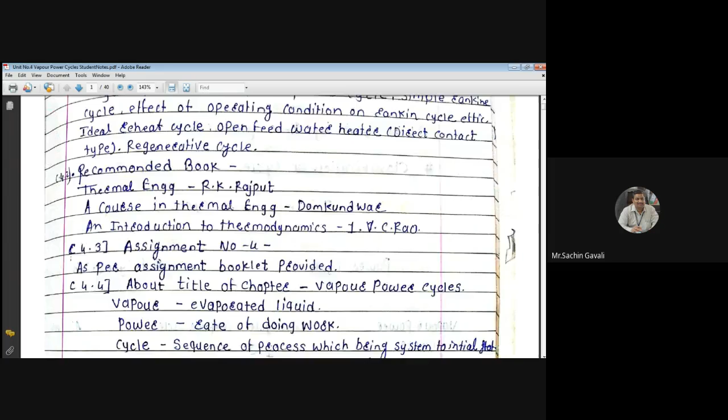Okay, last lecture I think we started the numericals on vapor power cycle, am I right? And those are your friends, yes, those not attending these lectures - how can they understand the numericals?

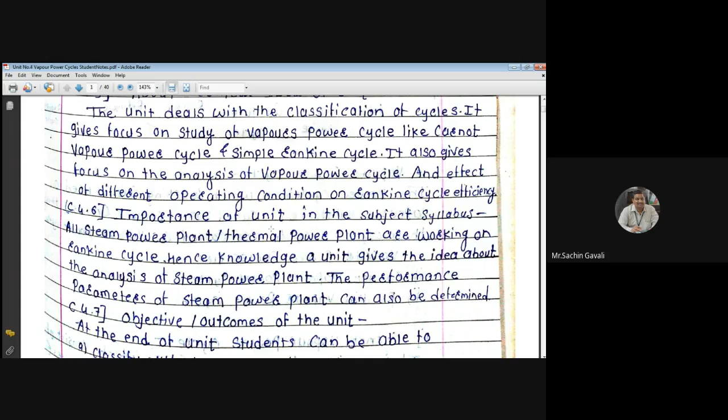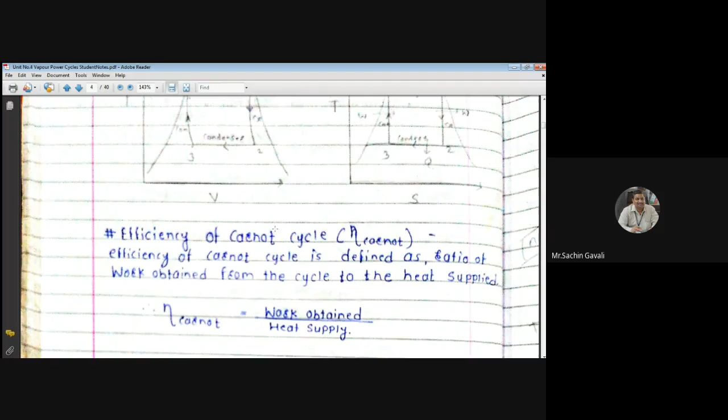So please ask your friends to join immediately, otherwise it will be very difficult for them to understand these numericals. I don't know why they are not attending, this problem with them I don't know. But still, request your friends who are not attending this lecture to attend, so that we can have more practice of this numerical, because in every examination they are going to ask numericals on this. Okay, so I think we have taken that last numerical.

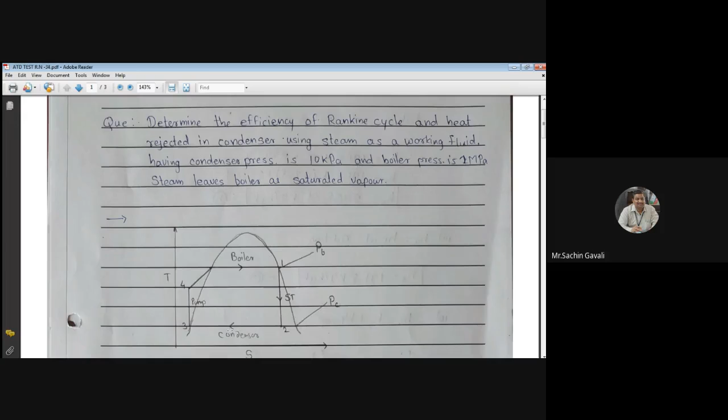1 to 2 is isentropic expansion, 2 to 3 is heat rejection in condenser. Boiler pressure is given in megapascal, we have to convert it into bar because steam table values are in bar. So he correctly converted 2 megapascal into bar: mega means 10 raised to 6, so 2 into 10 raised to 6 divided by 10 raised to 5 pascal gives 20 bar. Similarly, condenser pressure 10 into 10 raised to 3 divided by 10 raised to 5 gives 0.1 bar.

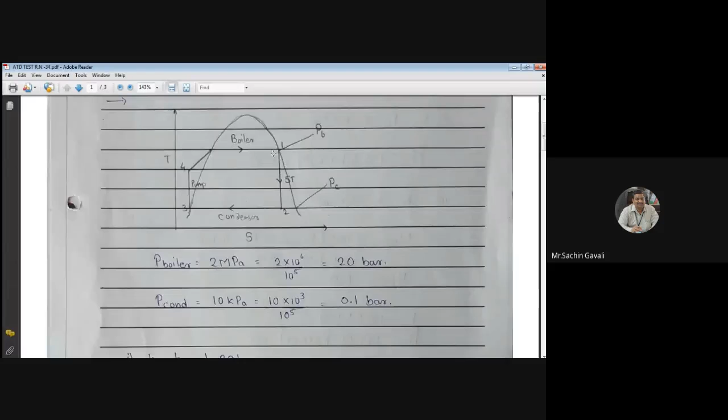Am I right? Then, as point number 1 is on the vapor line, we have to refer table number 2, and H1 is equal to Hg at 20 bar, which comes as 2797.2 kilojoule per kg Kelvin. Am I right? It is not Kelvin - it is wrong here, you have made a mistake. It is only entropy that has units kilojoule per kg Kelvin. This is enthalpy, so it is kilojoule per kg only. Take note.

So others' values are correct. Somebody can give... yes sir, correct. Okay good, so H1 is equal to 2797.2 kilojoule per kg.

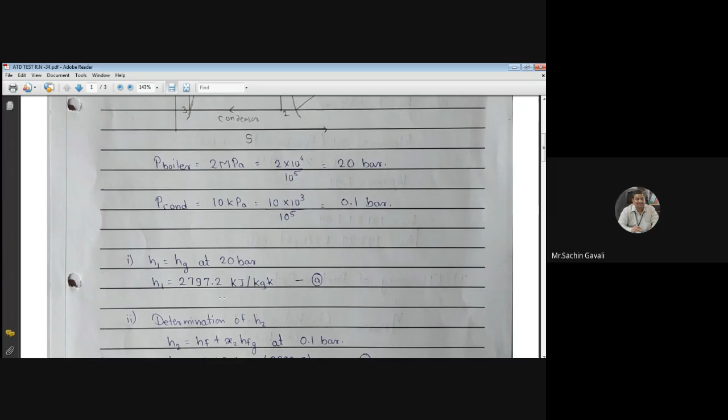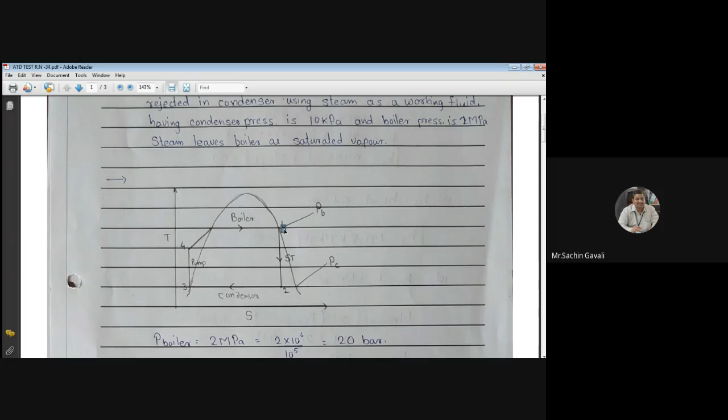Then we have to determine H2. Here H2 is there, wherever the arrow is here, H2 is there. This is the wet region, therefore its enthalpy we can calculate with the help of the wet steam equation. What is that equation? H2 is equal to HF plus X2 into HFG, and this HF and HFG we have to record at 0.1 bar because condenser pressure is 0.1 bar.

General practice: make sure pressure is written in the diagram so we can get the idea. At 2 condition, 0.1 bar we have to record. Again, we go for table number 2. Table number 2 means H2 is equal to HF at 0.1 bar, 191.8 plus X2 into 2392.9. But X2 we are not knowing.

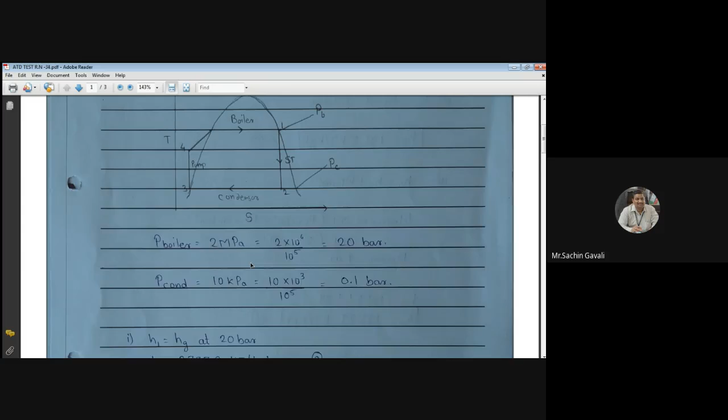We have to calculate X2 now, and for that we take help of the isentropic condition: S1 is equal to S2. Here we know S1 is equal to S2. Yes, the TS diagram is there.

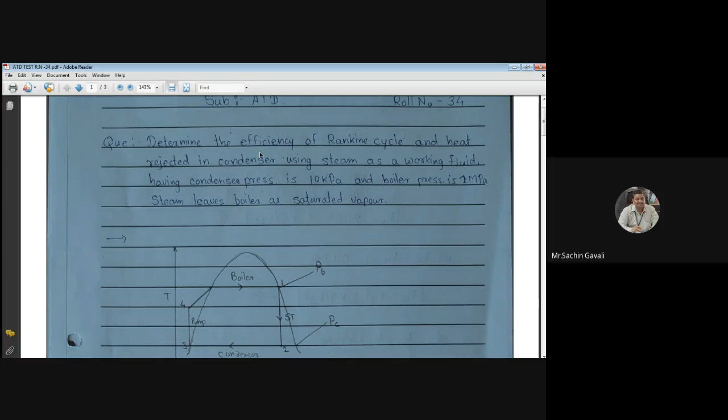S1 is equal to S2, and therefore S1 is equal to SG at 20 bar, since the boiler pressure is 20 bar. So S1 is equal to SG at 20 bar, not 2 bar, 20 bar. It will be 6.337 kilojoule per kg Kelvin.

It is correct. Then afterwards, S2 point is in the wet region, therefore its entropy will be similar to the enthalpy equation. What is that equation? S2 is equal to SF plus X2 into SFG. In that case it becomes 0.649 plus X2 into 7.502.

6.337 is S1, and SF at 0.1 bar is 0.649, and SFG at 0.1 bar is 7.502. If you do this calculation, 6.337 equals 0.649 plus X2 into 7.502, and X2 will come as

5.688 divided by 7.502, which gives 0.758, meaning it is 0.76. So X2 we got.

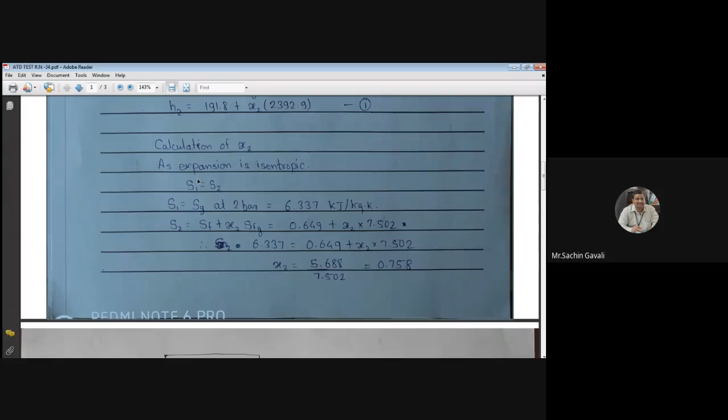After X2 we have to put this in equation 1: H2 is equal to 191.8 plus X2 into 2392.9. Putting X2 equal to 0.76, we get H2 is equal to 2005.61. H2 will be in kilojoule per kg.

Then H3 is equal to HF at 0.1 bar. Therefore H3 is equal to 191.8 kilojoule per kg. This is the value of H3 in this equation. You have to know that.

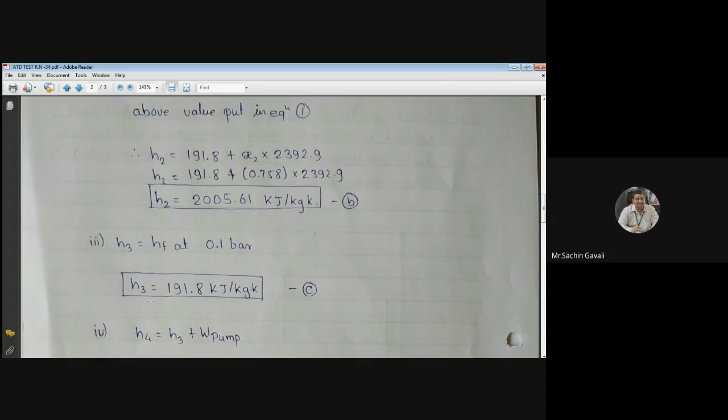H4 is equal to H3 plus W pump. Now H3 we know, W pump we can calculate with the help of boiler pressure and condenser pressure in bar. The equation: W pump is equal to 0.1 into boiler pressure in bar minus condenser pressure in bar, which becomes 1.99 kilojoule per kg.

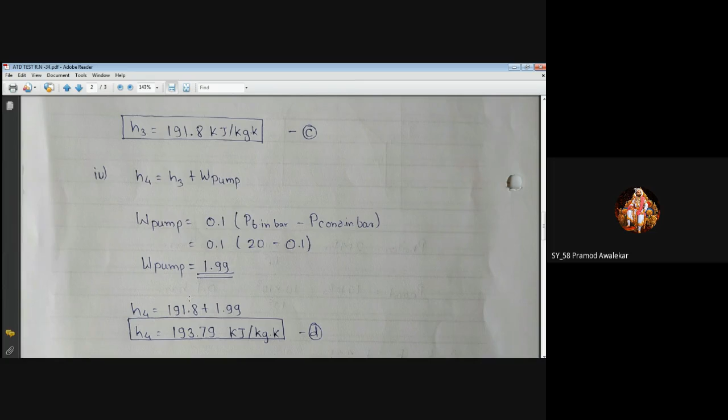So H4 is equal to 193.79 kilojoule per kg. This equation is there. Everybody getting same answers? H1, H2 - yes sir, okay good. Kunal - yes sir, okay. Pramod is also getting the same.

Then efficiency of cycle - we have the formula: heat supplied minus heat rejected, divided by heat supplied. So H1 minus H4 minus H2 minus H3, divided by H1 minus H4. This formula we have to keep in mind.

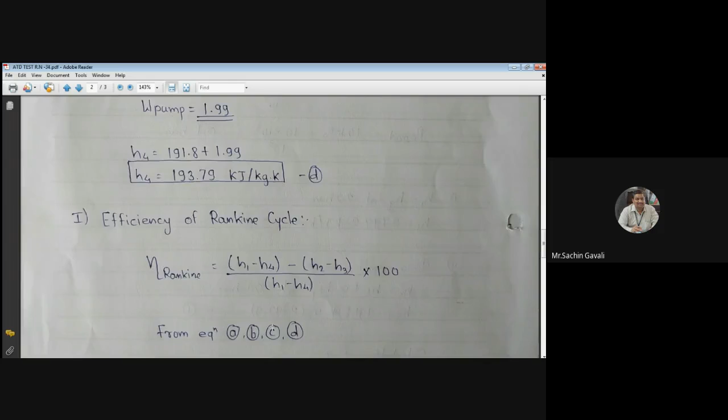Very simple - if you know the diagram and the processes correctly, only this simple thing: heat supplied minus heat rejected divided by heat supplied, or work done by turbine minus work done by pump divided by heat supplied. From equations A, H1, H2, H3, H4, if you put the values, efficiency is coming as

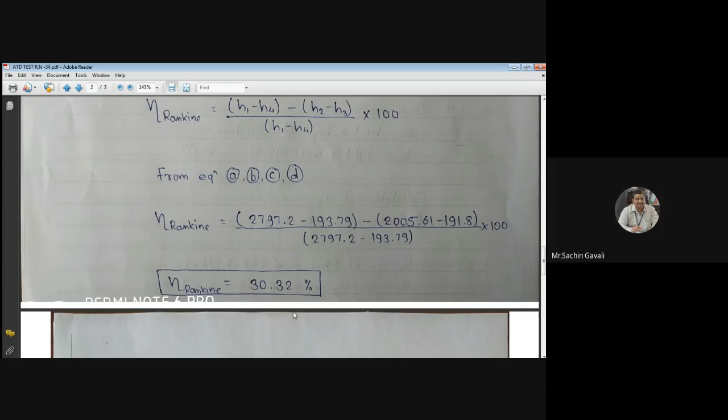30.32. And I have told you that efficiency is in the range of 30 to 40%. So this range is coming correct. I think it might be correct.

Work ratio is asked: W net divided by W steam turbine, equal to WST minus W pump divided by WST. Therefore WST is equal to H1 minus H2, equal to

791.59. W pump is equal to, already we have 1.99. Then work ratio is equal to WST 791.59 minus 1.99, divided by W steam turbine 791.59, equal to 0.997. Already I told you work ratio is always in the range near to 1, maybe 0.98, 0.99. Here it is very, very near to 1.

Heat rejected in condenser is equal to H2 minus H3. What is heat rejected? 2005.61 minus 191.8, therefore it is equal to 1813.81 kilojoule per kg. And SSC is coming as 3600 divided by W net.

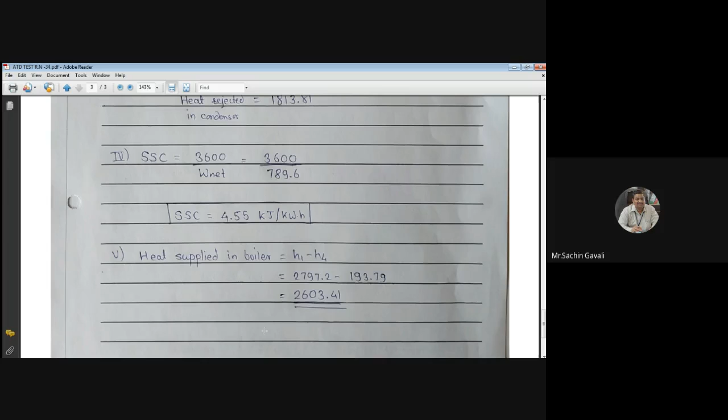Okay, so this is, I will go to the next numerical. On that day, that numerical we had taken from the PowerPoint presentation, na? Yes sir, okay.

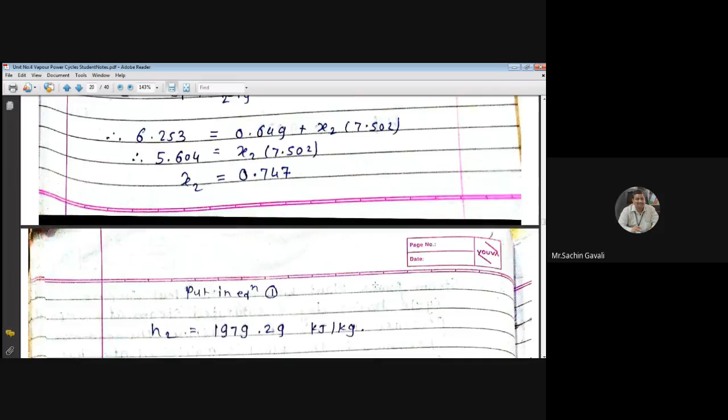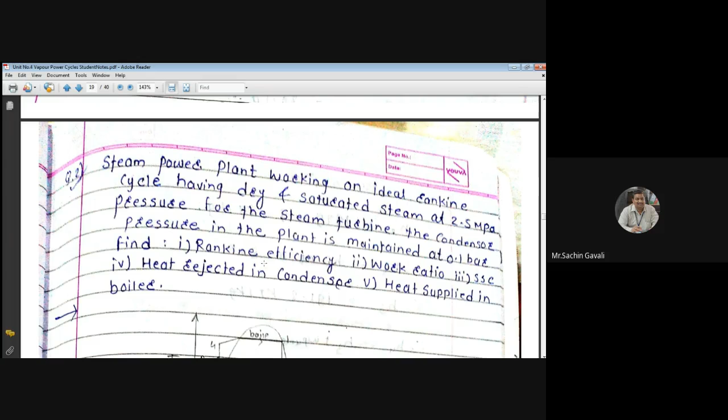So here, if you see, we are in other numerical, is there. This numerical were taken, am I right now? 2.5 or this only were taken, 2.5 megapascal. Let us have practice this. 2.5 megapascal were solved.

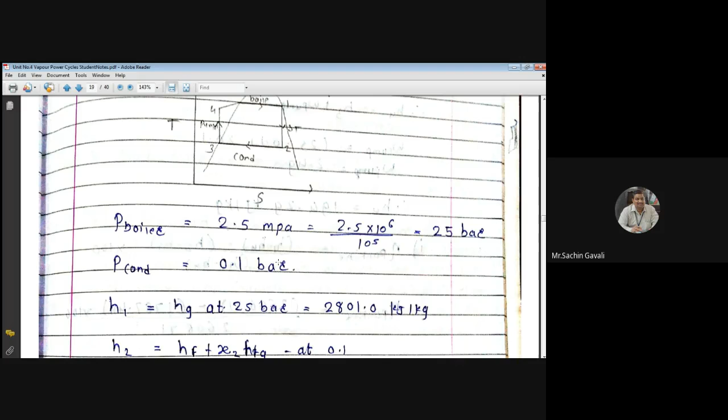Not solved, na? 25 bar and 0.1 bar, I did not solve. So let us have one practice numerical. Solved? This, solve sir, already solved. Jhale? Solve kelay sir. Solve, okay good.

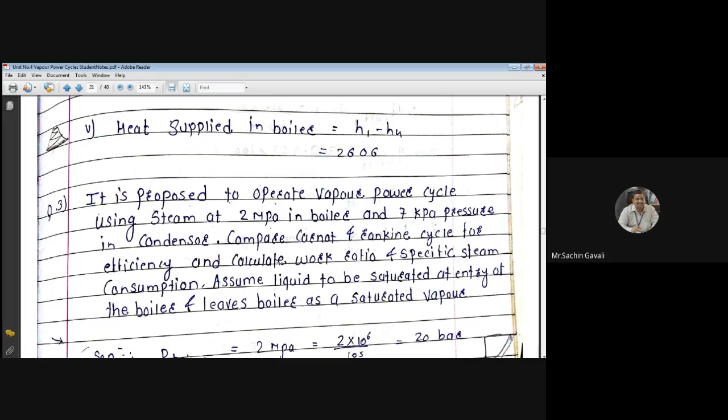Okay, now this numerical will take. Chalo. Okay, take this numerical.

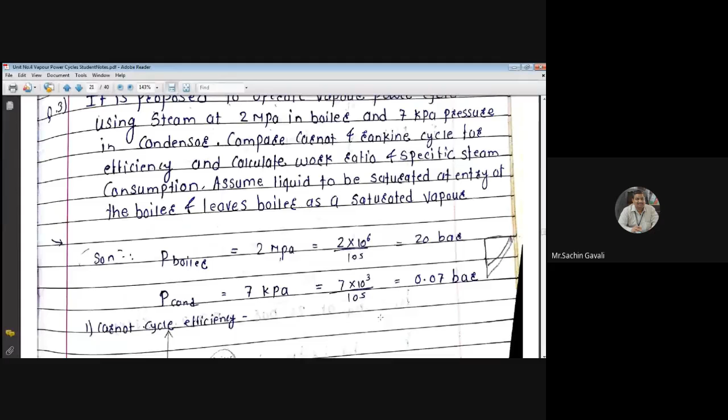So okay, so it is proposed to operate a vapor power cycle using steam at 2 megapascal. Now 2 megapascal means 20 bar, that we know. So 2 into 10 raised to 6 divided by 10 raised to 5 is equal to 20 bar. Okay, at the same time, here P condenser is equal to 7 kilopascal is equal to 7 into 10 raised to 3 divided by 10 raised to 5 is equal to 0.07 bar.

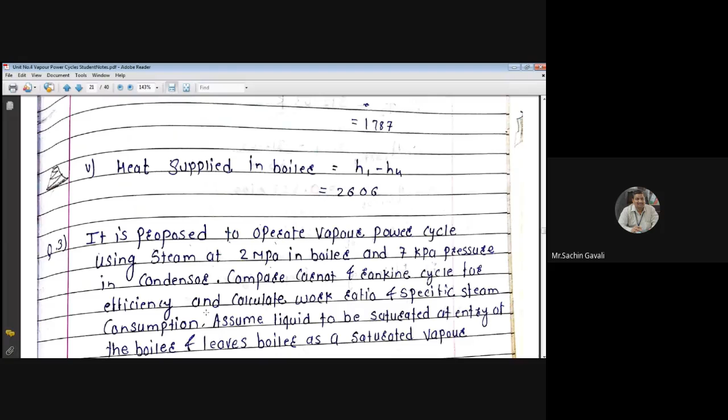Okay, and then Carnot cycle efficiency we have to calculate. Now Carnot cycle and Rankine cycle, both cycles' efficiency we have to compare here. Okay, Carnot cycle is an ideal cycle. So here, therefore, the heat addition process, if you assume the cycle as a Carnot cycle, it will only cover into this saturated curve, because heat addition during only this dome or curve will remain isothermal. So 4 to 1 is isothermal heat addition in Carnot cycle, and 2 to 3 is isothermal heat rejection in condenser in Carnot cycle only.

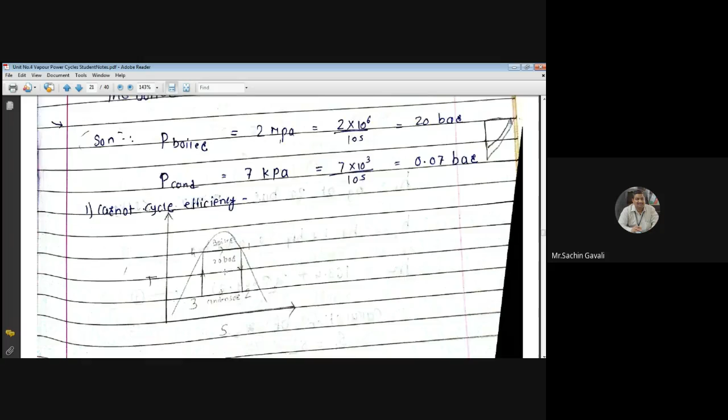Okay, therefore this Carnot cycle is bounded by a curve in a square. Okay, this kind of 4 to 1, 1 to 2, 2 to 3, 3 to 4. Because due to isothermal limitation, this process will not come outside this curve. Therefore, this is the Carnot cycle. Okay, and we know that Carnot cycle efficiency depends on only...

Anybody who is there, okay, who is studying here, I can get - Carnot cycle efficiency is a function of only... anybody? Temperature. Temperature only, correct. So therefore, Carnot cycle efficiency is related to temperature. So therefore, eta Carnot is equal to 1 minus T2 upon T1, or T1 minus T2 divided by T1. We have solved this, we have got this derivation, or we have got this formula. Am I right? But T1 and T2 should be in Kelvin.

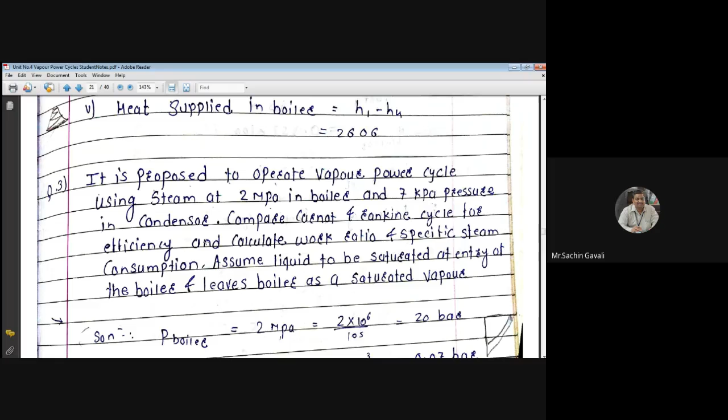312.03 केल्विन. मग किती झाले ते दोन्ही मिळून? हियर इफ यू कॅल्क्युलेट, इटा कार्नॉट इज इक्वल टू 1 मायनस 312.03 डिवाइड बाय 485.4, and the efficiency becomes 35.71. This is a Carnot cycle efficiency. हे न्यूमेरिकल 2-3 वेळा परीक्षेला आलेलं आहे.

ओके, Carnot cycle efficiency कशी फाइंड आउट करायची, बिकॉज इट इज अ फंक्शन ऑफ ओनली टेम्परेचर. त्याला टीएस डायग्राम आपल्याला माहित आहे तशी काढली आपण. फर्स्ट ऑफ ऑल ड्रॉ द टीएस डायग्राम, देन आफ्टरवर्ड्स we have obtained the temperatures, saturation temperature from the corresponding pressure.

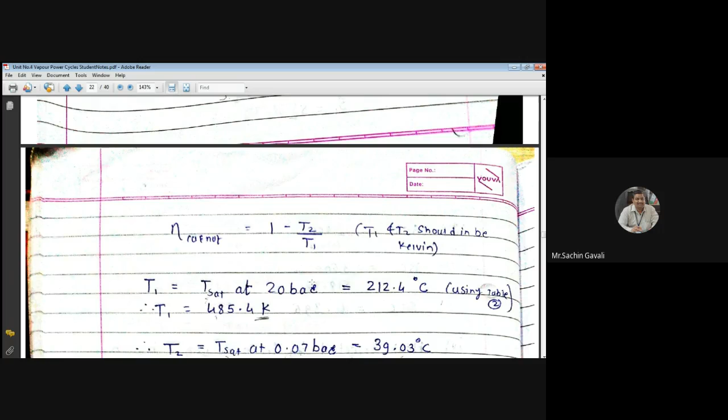that is T1 is equal to T sat at 20 bar, 212.4, त्याला आपण केल्विन मध्ये केलं 485.4. तसंच T2 is equal to T saturation at 0.07 bar, तो 39.03 डिग्री सेल्सिअस आला, आणि T2 आला आपला 312.03 केल्विन. इटा कार्नॉट आपला किती आला? 1 मायनस 312 आणि त्याप्रमाणे 35.71%. एव्हरीबडी अंडरस्टँड?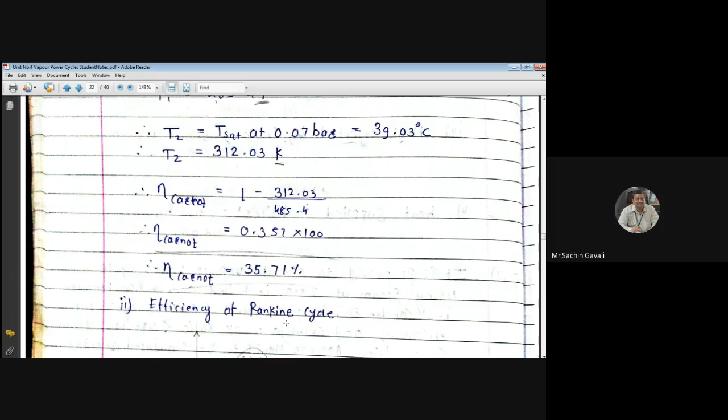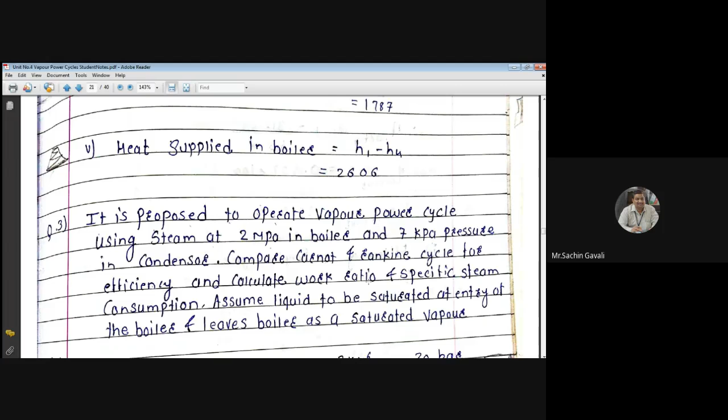Okay, then efficiency of Rankine cycle. Now we have to draw the TS diagram for Rankine cycle when steam entering to the turbine is dry and saturated, like our usual method. What is that, the efficiency of Rankine cycle, okay.

So 4 to 1, 1 to 2 is steam turbine process, 2 to 3 is heat condensation, 3 to 4 here is isentropic compression in pump, okay, and then 4 to 1 heat addition in boiler, okay.

And then in that case, now our usual practice, whatever numerical we have solved, this procedure I think it was little bit different than other numerical I have.

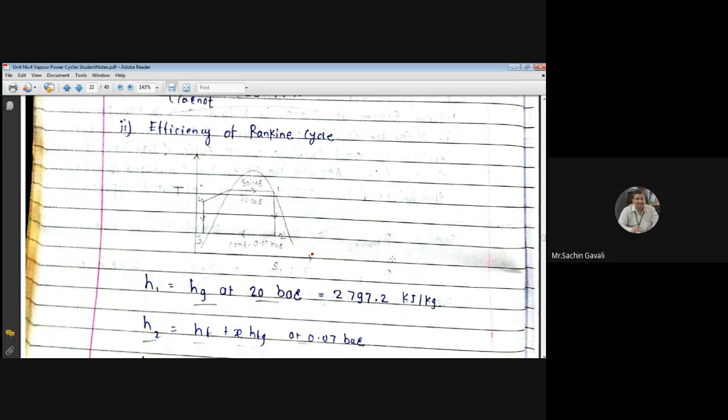Okay, so Kunal, Kunal is getting Carnot efficiency as 37.15%. Okay good, correction is there. Okay Kunal, okay no problem.

And Nikita Pawar is getting Rankine cycle efficiency as 31.53%. And Kunal is getting 32.25%. Okay, we'll see majority, others will wait. Somebody, other's answers will wait and we'll check the answers.

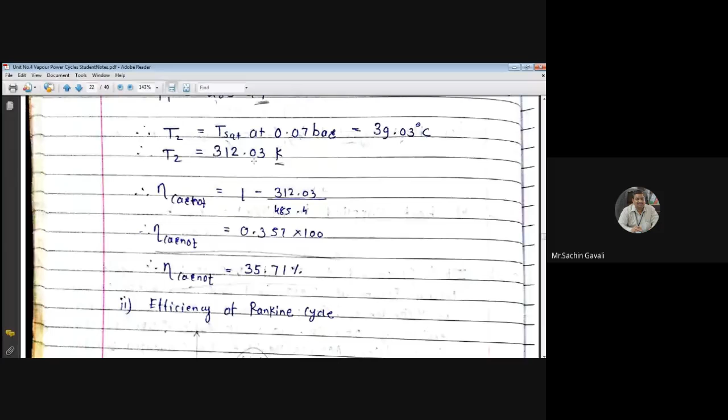So here I think, okay for others reference, 31.34. Both may be correct, that is not the big issue.

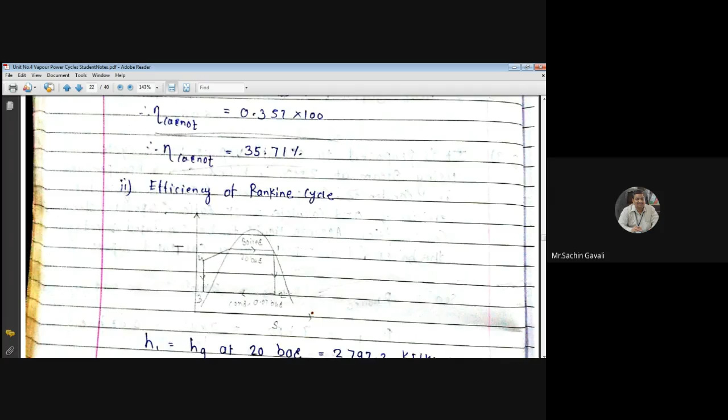Okay, now with this, H1 is equal to Hg at 20 bar, 2797 we got. H2 is equal to HF plus X HFG at 0.07 bar. Then HF at 0.07 bar, that HF and HFG we have to record from the steam table. Steam table: HF is equal to 163.4, HFG is equal to 2409.2. Everybody knows how to take this value, table number 2 I have to go for.

Then we write the equation: 163.4 plus X2 into 2409.2, equation number 1. Then we calculate X2, but how are we calculating S1? S1 is equal to S2 with that consideration, isentropic expansion in steam turbine. But S1 is equal to SG at 20 bar. Therefore, S1 is equal to SG at 20 bar, and is equal to 6.337.

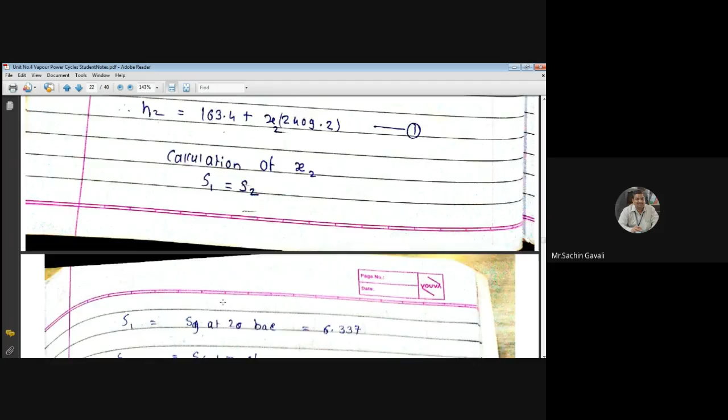At the same time, S2 is in wet region, point number 2, at 0.07 bar pressure. So S2 is equal to SF plus X2 SFG, is equal to 0.559 plus X2 into 7.718. As S1 is equal to S2, we can write 6.337 is equal to 0.559 plus X2 into 7.718, and therefore X2 is coming as 0.75. Am I right? Everybody's X2 is coming as 0.75? Yes, yes, yes.

If you put H2 is equal to 163.4 plus 0.75 into 2409.2, then H2 is coming as 1970.3 kilojoule per kg. Then H3 is equal to HF, H3 is equal to HF at 0.07 bar, and is equal to 163.4 kilojoule per kg.

Then H4 is equal to H3 is equal to 163.4. Then H4 is equal to H3 plus W pump. W pump we calculate as 0.1 into boiler pressure in bar minus condenser pressure in bar, and the value is coming as 1.993. Am I right? H4 is coming as 165.39.

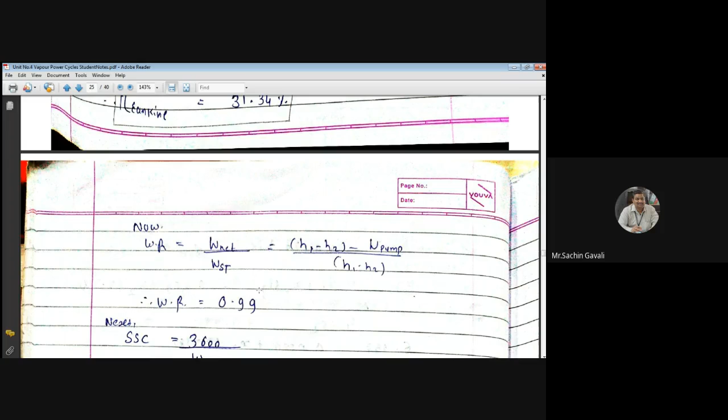So eta Rankine is equal to 31.34%. Some students are leaving in between, I don't know why they are thinking this way. Don't leave, tell your friends who are attending not to leave the class in between, because everything is important. These numericals are asked in examinations for 5 to 6 marks, so from the examination point of view, we should not skip the lecture, everything here is important, each and every sentence.

Your work ratio, if you want to calculate, is W net divided by W turbine, and everything we can know from that. WR is equal to 0.99. Kunal has also solved this and got the work ratio as 0.997, 999. Okay, then SSC.

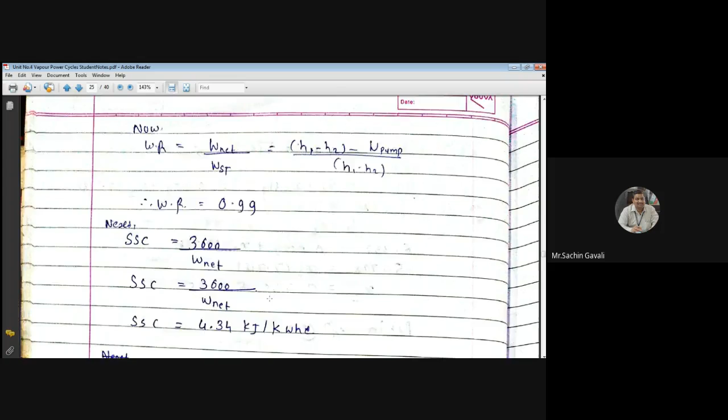Now here's another numerical for practice, same numerical. I want it done within 5 minutes. We have to complete this task today only.

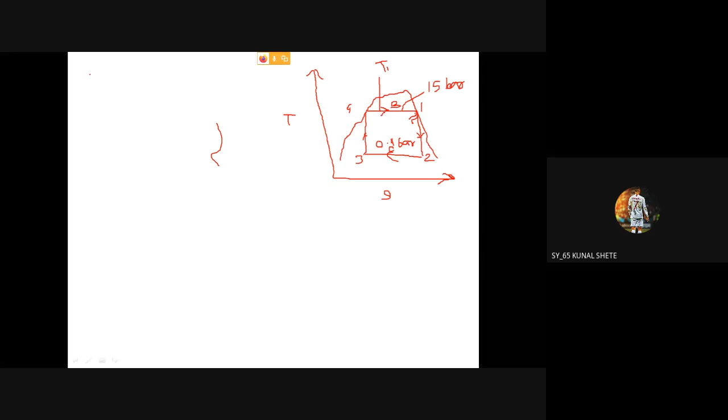Okay, then efficiency of Carnot cycle is a function of only two temperatures, T1 and T2. We can call this, sir, as 0.2 bar.

So we know that efficiency of Carnot cycle is a function of temperature only, and is equal to 1 minus T2 upon T1. Then T2 is equal to what, and what is T1? We have to find out. What is T1? It should be in Kelvin.

T1 is equal to T sat, saturation temperature, T sat at which pressure? 15 bar. And is equal to, who will tell now? T sat at 15 bar, saturation temperature. Kunal, fast, you tell.

Kunal, or somebody who is ready with the answer, please tell. T1 is equal to T sat at 15 bar, otherwise I have to go to my steam table also. Anybody ready? Put your answer. 198.3 degrees Celsius. Yes sir, and convert it into Kelvin, tell. 471.3, take it here in Kelvin.

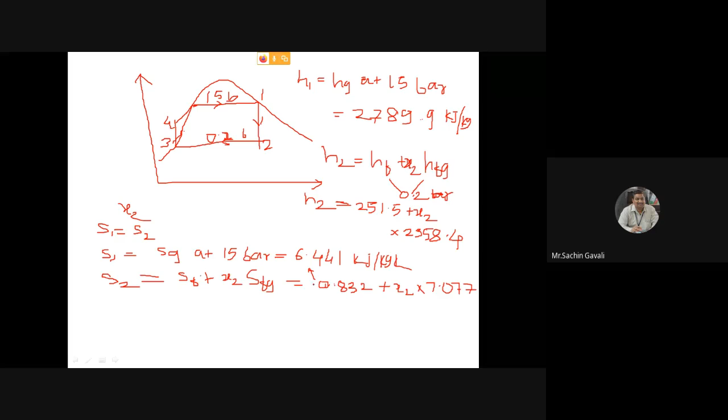What is that value of X2 coming? Shubham Gandole has answer 0.80. What about you, Kunal? 0.79, near to 80. You can tell the third digit - 0.792. Okay, majority will consider the answer as 0.79.

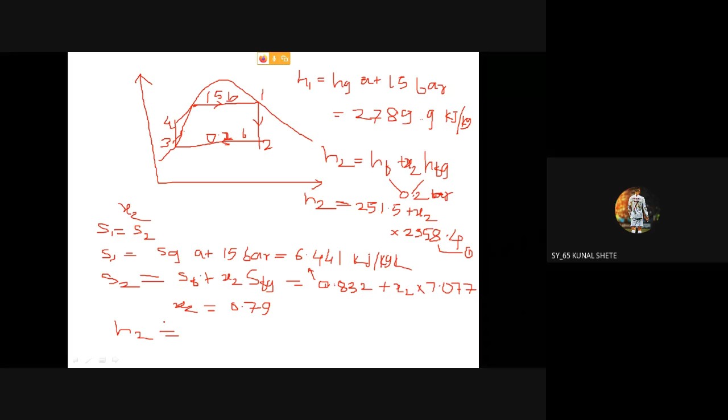Then once we got X2, H2 is equal to - put that value in the H2 equation, equation number 1. Not directly tell me the value, you have to put X2 only. I will not write all these things because it will take time. Somebody can tell H2 value. Shubham is speaking - 2138.22. Correct.

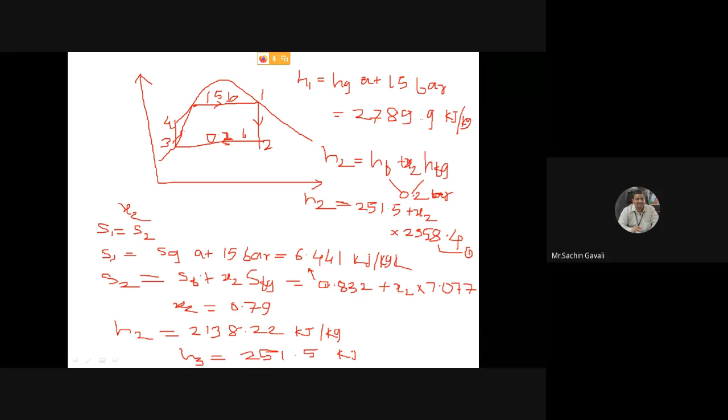Okay, then we have to calculate W pump, which is equal to 0.1 into P boiler in bar minus P condenser in bar. Therefore W pump is equal to 0.1 into 15 minus 0.2, and how much is it coming? Anybody help me? 1.48.

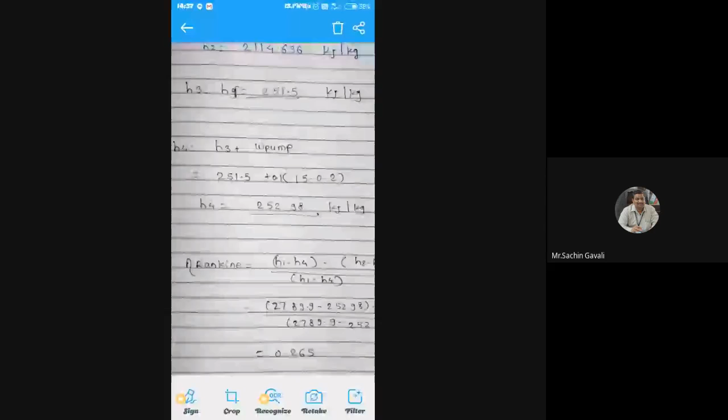Okay, now H4 is equal to 251.5 plus 0.1 into 15 minus 0.2, and it is coming as 252.98. Correct, H4. Then efficiency will become now.

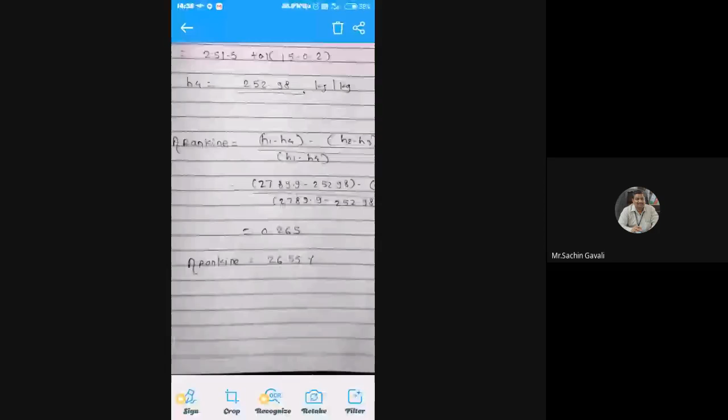26.55%. Okay, then what should be our comment? What should be our comment?

Comment is that Carnot cycle efficiency is greater than Rankine cycle efficiency.

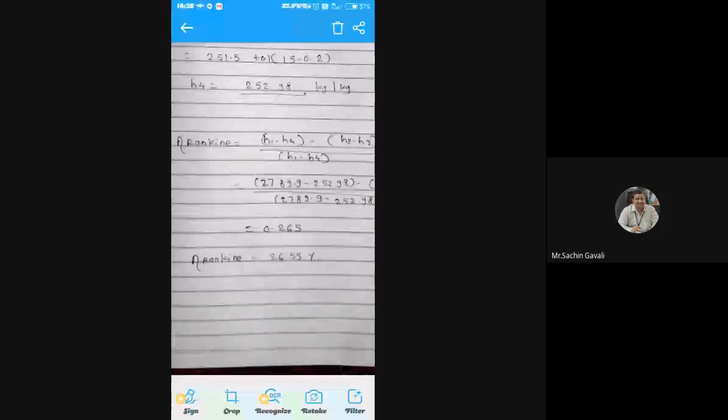Nikita, Kunal, okay, Gaurav. Then, okay, now next numerical will go for here: superheated steam supplied to the steam turbine. It's okay.

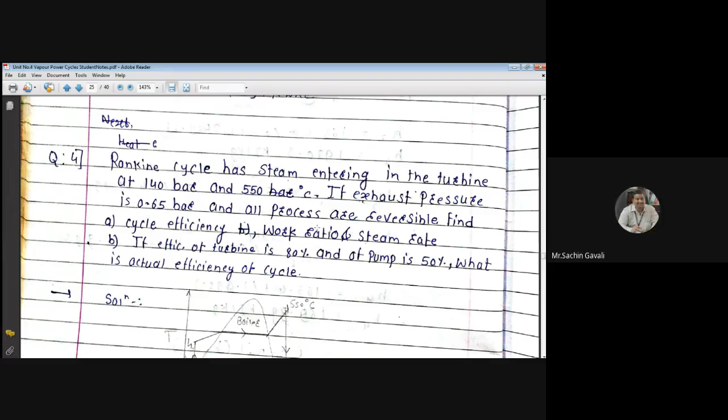This will be our today's last numerical, and I think, if you will decide, then next lecture will start a new chapter, second section. But till this, I think this is the last numerical. Other practice numericals you have to practice at your home. Same kind of numericals they are asking.

Rankine cycle has steam entering the turbine at 140 bar and 550 degrees Celsius. If the exhaust pressure is 0.65 bar and all processes are reversible, find A) cycle efficiency, B) work ratio, and steam rate. Steam rate means specific steam consumption.

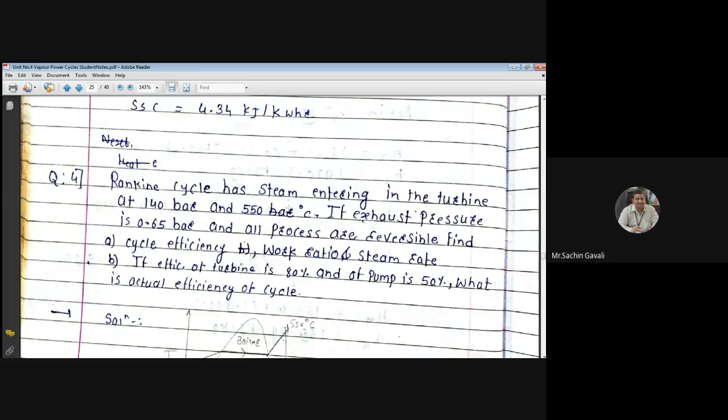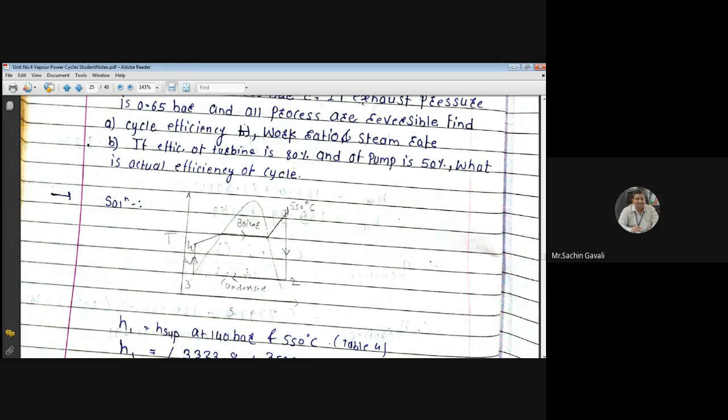Now what is the quality here? Steam type supplied to the turbine. What is the steam type supplied to the turbine? Anybody? Superheated. It is superheated, not dry and saturated. So superheated steam is supplied to the turbine.

Okay, therefore point number 1 will come on the superheated region. So here we have shown. So our nature is like this. So this is our superheated zone, and from that isentropic expansion happens. Okay, so this point 2 should be like this.

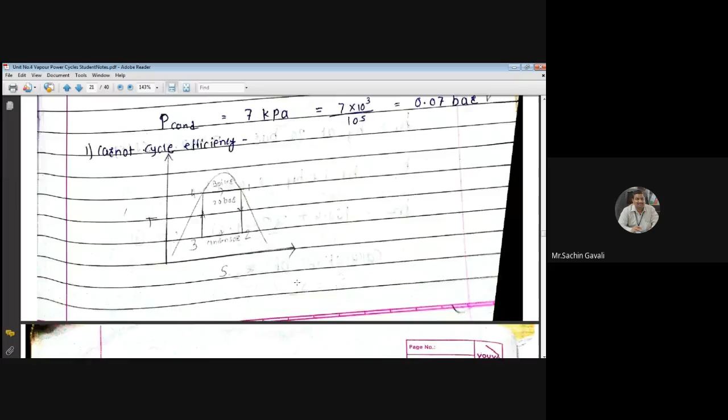Okay, the steam is what? 1 to 2. Steam is superheated. Pressure is 140 bar and 550 degrees Celsius. And here, this cycle, like this you consider. Point 2 should be inside this particular wet region. So that student has made a mistake. Okay, so point number 2 should be in the wet region. Okay, and then same way, same procedure we have to do.

The only thing is that here, point number 1, to find out enthalpy of point number 1, what do I have to do? Which table do we have to refer? Anybody? Which table do we have to refer?

Table number 4 is used to find out the enthalpy of superheated steam. Others are same. Point number 2 will be in wet region: HF plus X2 into HFG, that will not change.

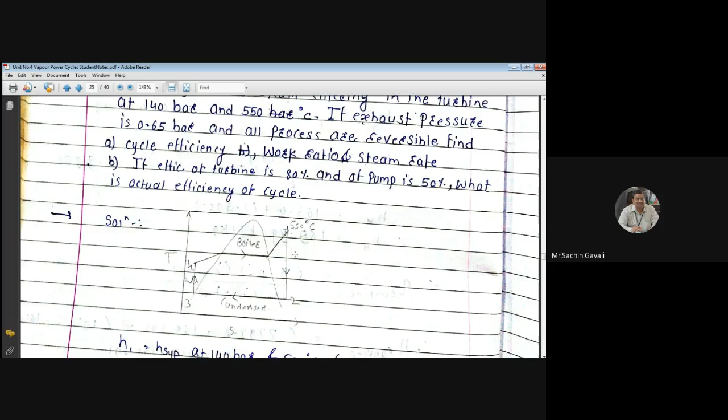We have to draw the diagram. That student has drawn the diagram: 1 to 2, 550; 2 to 3, 3 to 4, and 4 to 1. So H1 is equal to H superheated at 140 bar and 550 degrees Celsius.

Table number 4, but 550 is not available in the steam table, correct? Am I right? Now it is in 500 and 600. It may be there, correct? 140 bar is available, but only at 500 degrees Celsius and 600 degrees Celsius. But we know that 550 degrees Celsius is the mean of 500 and 600.

So therefore H1 is coming, by table number 4, because it's superheated steam, am I right? Yes sir, okay. Then H1 is coming as 3456.15. Similarly, point number 2 is in which region?

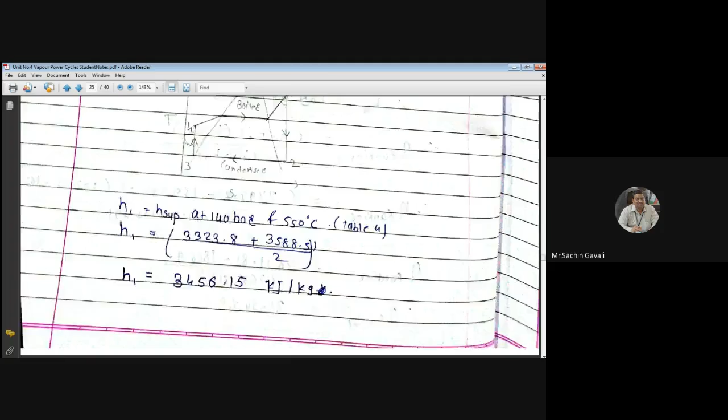Wet region only. What is the pressure? 0.65 bar. So H2 is equal to HF plus X2 into HFG at 0.65 bar. We have to draw the equation. S1 is again S superheated at 140 bar and 550 degrees Celsius, equal to 6.555. S2 will be same at 0.65 bar.

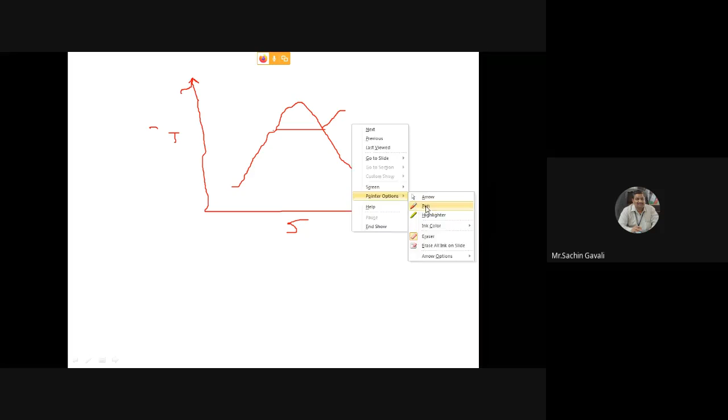No sir. Okay, so this is our TS diagram. Understand that this is a vertical line, I'm trying my best to make it. Okay, so this is our boiler pressure line. The steam is superheated. And from this, okay, this is point number 1. Process happens in the steam turbine.

That student made a mistake in showing point number 2. Here point number 2 is in the wet region. And then afterward, this is the entire process, 4 to 1 is the entire process. What is the pressure? 140 bar, condition is 140 bar, and 550 degrees Celsius.

Okay, and here pressure is 0.65 bar. So it's a little bit tricky to solve. Then H1 is equal to H superheated at, this is our diagram, 140 bar and 550 degrees Celsius.

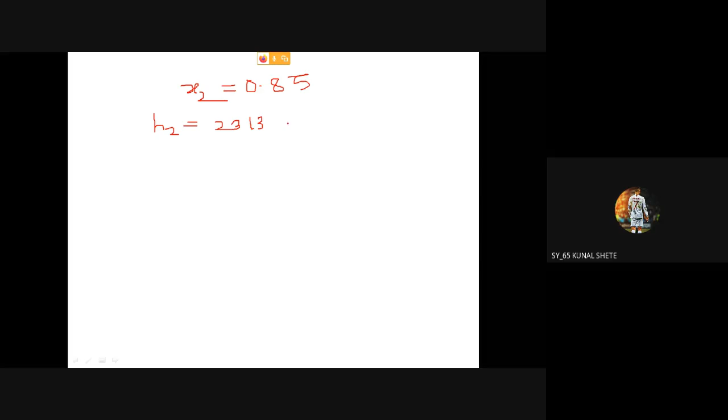Then H2, H2, now tell the value of H2, Kunal. 2313.6975. Okay, at 6975, I will consider 69, I am getting kilojoule per kg, I assume now.

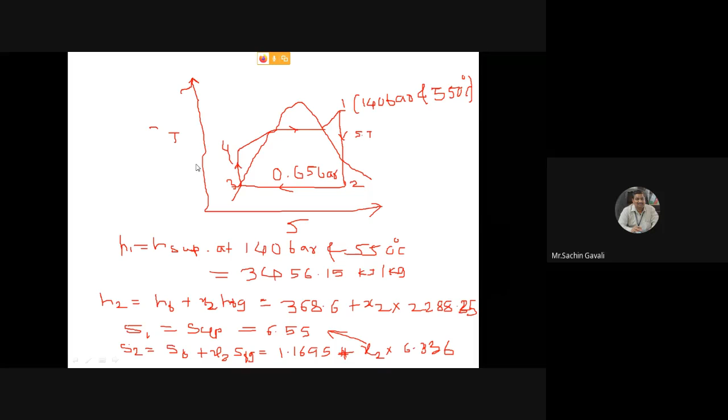H3 is equal to, now already we got the value. Previously how much did we get? H3 is equal to 368.6.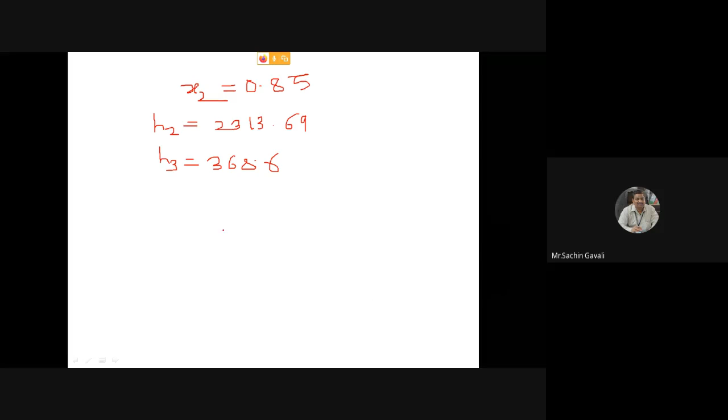Kilojoule per kg, I assume. W pump. Shall I write now only 0.1 into 140 minus 0.65. How much is it? 13.935, 13.9. Okay, kilojoule per kg. And H4 is coming equal to H3 plus W pump is equal to how much?

So also got 36.71. Everybody is getting 36.71 near about answers. Very good, very good. H4.

382. 382. 0.535. 53, I will write only. Okay, and H1, H2, H3, H4 you got.

Then eta rankine is equal to H1 minus H4 minus H2 minus H3 divided by H1 minus H4. Put the values and we will get efficiency as 36 point, near about 7.

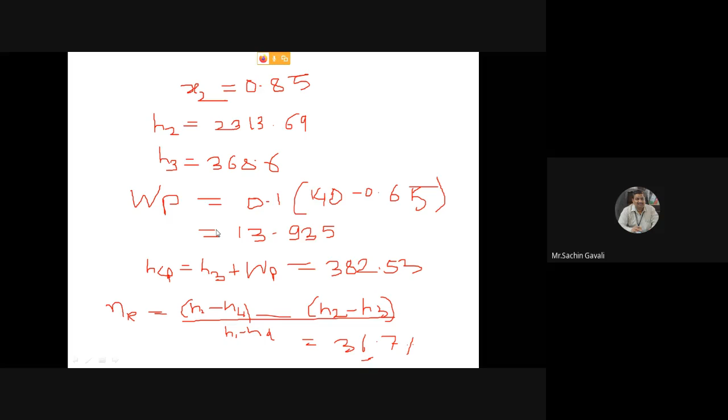Okay, now I think I'll give the next numerical to you. Sir, okay, anything, last point remained in that question. Which one? Steam rate? Sir, if efficiency of turbine is 80% and of pump is 50%, what is the actual efficiency of cycle?